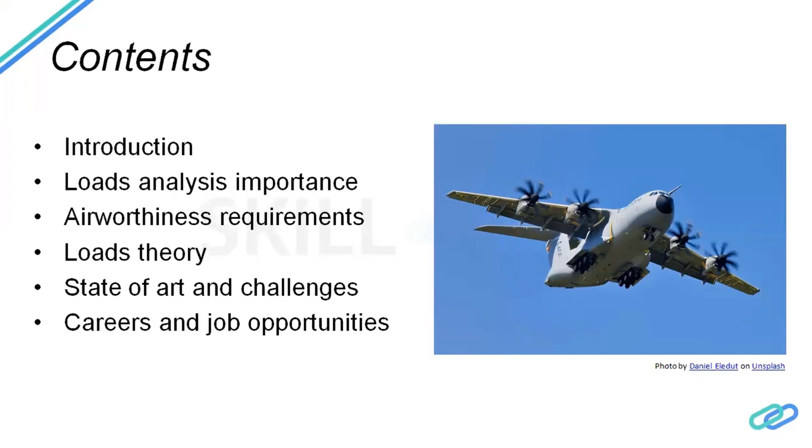I'm sure that everybody here knows that developing an aircraft is not a simple task. There are many areas that are involved. There are professionals dedicated for design, professionals that are dedicated for aerodynamic systems. There are a lot of systems in the aircraft, the operation of the aircraft, and areas that are related to the aircraft structure. Loads analysis is directly related to the aircraft structure. And it's one of the most important stages during an aircraft development.

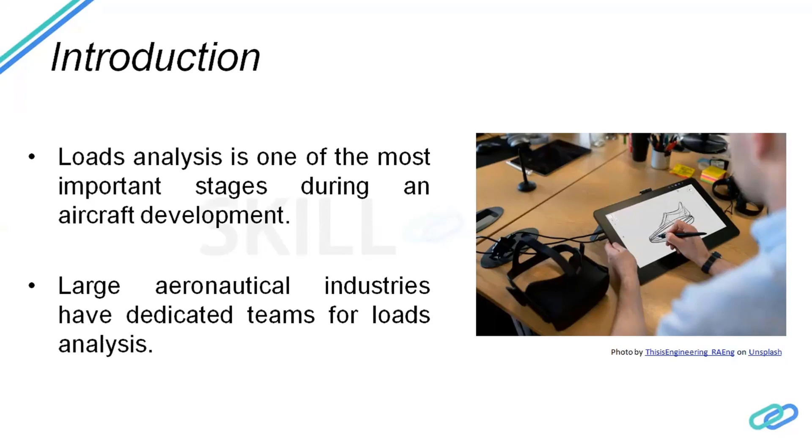Large aeronautical industries, for example, Boeing, Airbus, Embraer, and others, all of them, they have dedicated teams for loads analysis. There are many engineers working specifically in loads analysis. Now let's see the data exchange about these areas. Loads team will provide information for almost all areas in the industry, but the main areas are these three. You can see the stress team, the systems team, and operation.

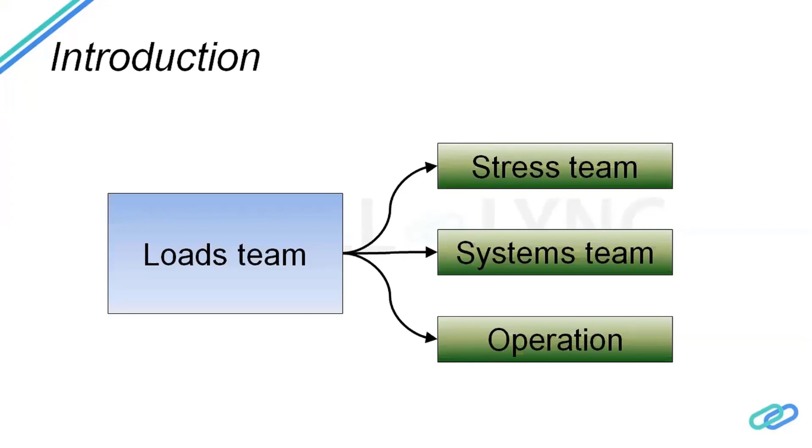The stress team is responsible for the structural project, and the systems team, it's a very big area because it's responsible for all systems in the aircraft, and it's divided into small sections. For example, electrical system, hydraulic systems, and many others. And the operation area that is responsible for making rules about how to fly the airplane, how to operate the airplane. So why loads analysis are so important?

I'm sure that everybody here knows that flying is safe and it must be safe. And everybody here knows that it must be feasible. I had a professor in the university. He used to say in a very fun way that to fly, we need only three things. We need angle of attack, relative wind, and money. So we should try to reduce money, but not reducing safety. Of course, aircraft must be light as possible. And as a consequence, it must be cheap.

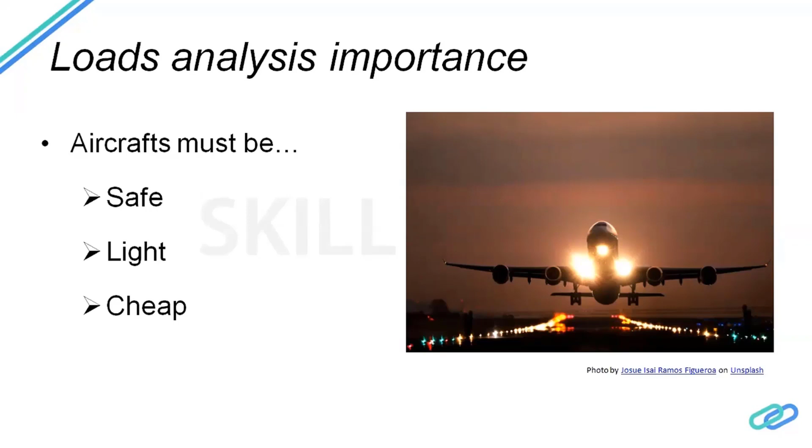I'm sure that none of you would pay $50,000 to fly from the United States to Europe. I would not. I would pay $1,000 or $2,000 because it must be feasible. People must fly. Okay. So let's go a little deeper in data exchange, the clients of the loads team.

As I've already mentioned, the stress team is responsible for the structural project of the aircraft. And to project, they must analyze the structure and size the structure. Okay. And they cannot do anything if they don't have loads that this structure must withstand. So I put there a very basic requirement that the aircraft structure must be able to support limit loads without any detrimental permanent deformation. It's one of the great amount of requirements that the structure must comply with.

For example, when I say limit loads, I'm talking about the highest loads that are expected in the aircraft service. And there are other types of loads. For example, ultimate loads, the structure cannot fail. And there are also fatigue loads. So, as I've already mentioned, the structure must be safe. And these two teams work together. Loads team provide information to the stress team, and the stress team will size the structure as light as possible, without forgetting safety.

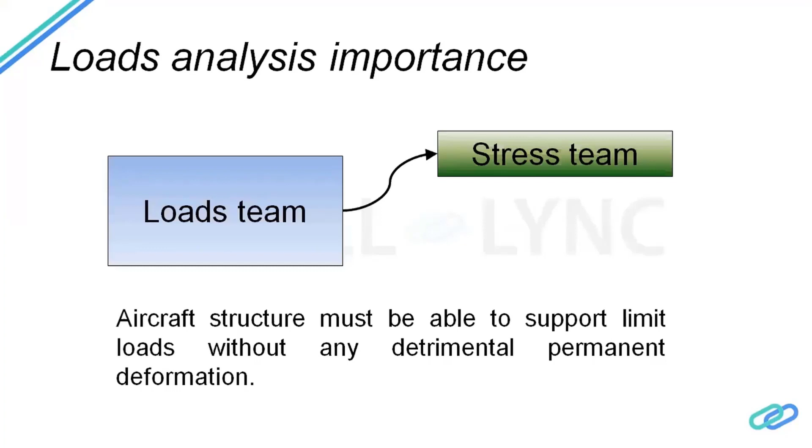The systems team, as already mentioned, comprises many other smaller areas, for example, hydraulic systems, electrical systems, environmental systems, and many others. I know that when airplane flies, when airplane goes through a taxi, it shakes. The airplane structure oscillates. And this oscillation, sometimes it's called vibration, sometimes it's severe, sometimes it's not comfortable. When we passengers feel these oscillations, sometimes it's not comfortable.

And the devices that are part of the systems must be safe. They must withstand this structural vibration without failures. For example, display monitors must stay safe. They must remain showing information for the crew. Hydraulic lines must stay safe, and also electrical components.

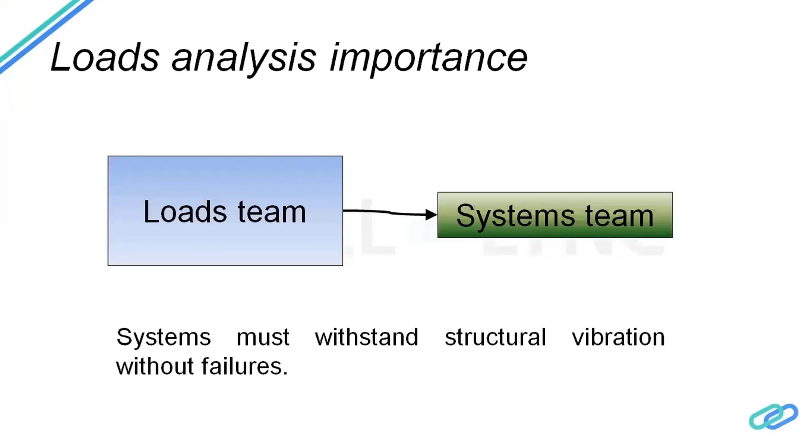So this structural vibration must be correctly determined by the loads team, and this data, this acceleration, must be provided to the systems team so they can guarantee systems will not fail. And the operational team is going to make rules about how the airplane must fly, especially concerning maneuvers.

For example, do you believe a commercial airplane is subjected to the same loads as an acrobatic airplane? Surely not. Because when we see an acrobatic airplane, the maneuvers are very severe, and as a consequence, loads are more severe. So the loads team must determine a flight maneuvering envelope, and this flight maneuvering envelope will be used in determining the airplane's structural operating limitations.

As an example, once I saw a video of a Hercules, a military aircraft. It was carrying water to extinguish fire, and I believe they put a lot of water inside it. And when the pilot pulled the command to a pull up, the wings broke, and it was tragic. I don't know if they did not respect the flight maneuver envelope, but it's very important because the aircraft must respect it.

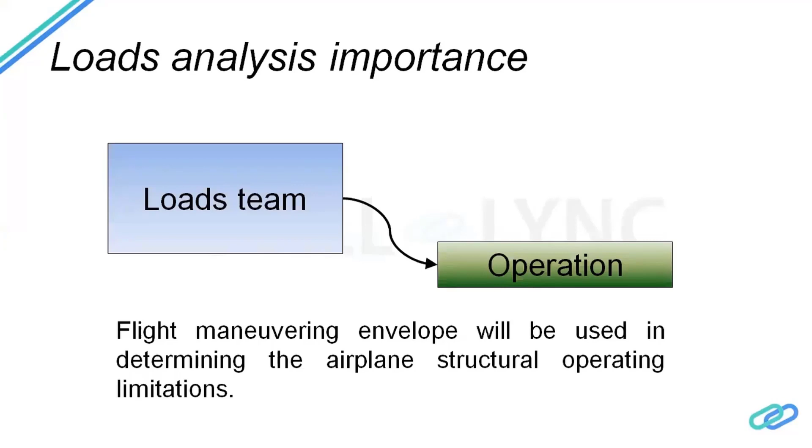One of the greatest efforts of the aeronautical industry is to comply with the airworthiness requirements. All technologies must comply with their specific requirements. And these requirements are made by agencies. The two most famous agencies are the Federal Aviation Administration in the USA and the European Union Aviation Safety Agency, and other countries have their agencies, and sometimes they have their specific requirements because of their particularities.

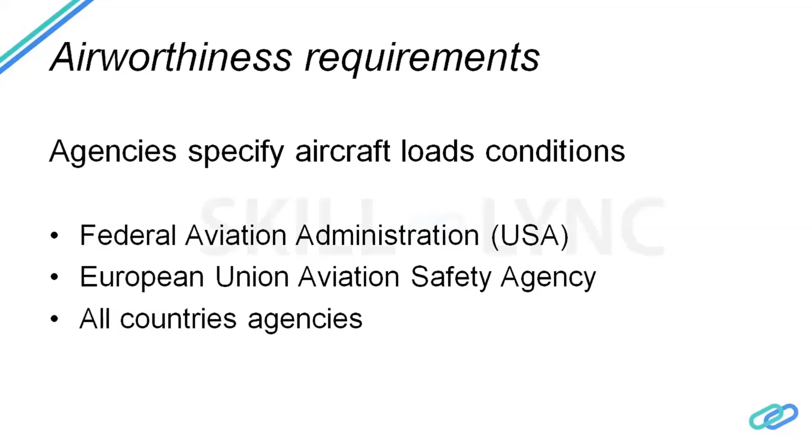And if I want to sell my aircraft, if I want to make money with my aircraft, I must comply with airworthiness requirements. I cannot design my aircraft the way I want to. I must respect these requirements. And now let's see how the loads team is guided by these requirements. But before that, we must define two types of loads. We have external loads and internal loads.

The external loads are loads that are applied in the aircraft by another body, something that is outside of the aircraft, for example, the air, gusts; when the aircraft touches down during landing, the runway applies loads in the aircraft. So these are external loads. And external loads will lead to internal loads throughout the airframe. Internal loads may be roughly defined as loads that a structural component applies in another component, or a component section applies in the adjacent section.

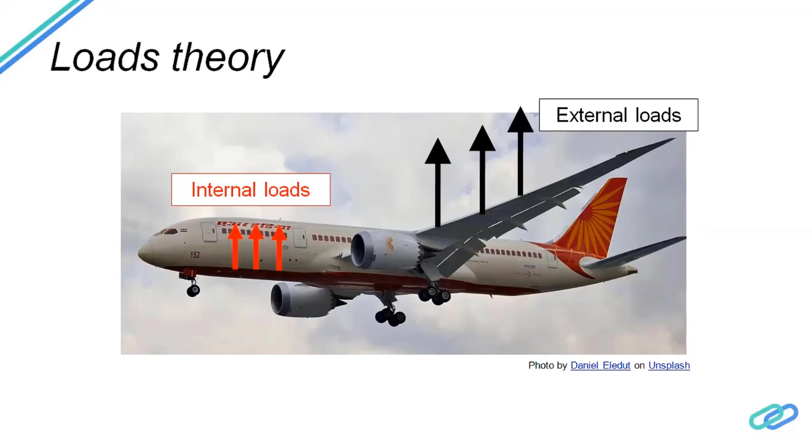When I say loads, I say forces and moments. Some components are more subjected to forces, others are more subjected to moments. And how are these loads determined? Which are the magnitudes of the external loads? They are specified by airworthiness regulations. Airworthiness regulations will state the conditions that engineers must consider to determine how high external loads must be.

For example, regulations state the speeds of the aircraft during landing, vertical and horizontal speeds. For example, gust intensities, gust shapes. Regulations say: design my aircraft to withstand gusts with certain severity. And internal loads are determined by loads theory, and this is all the engineering task.

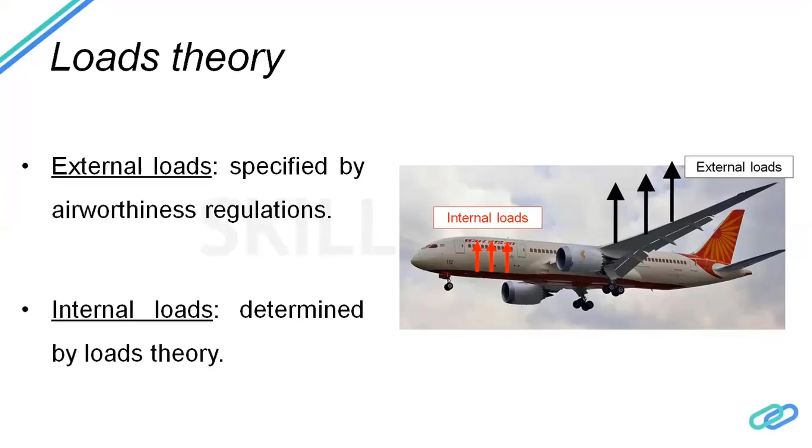The aerodynamic forces area is when a body is in a flow, and it's subjected to different pressures, for example, and these different pressures may lead to a resultant force.

This body may accelerate because of aerodynamic forces. And the elastic forces: the structure has a stiffness or flexibility, so the structure will deform. And this subject is commonly treated in strength of materials disciplines, mechanics of materials.

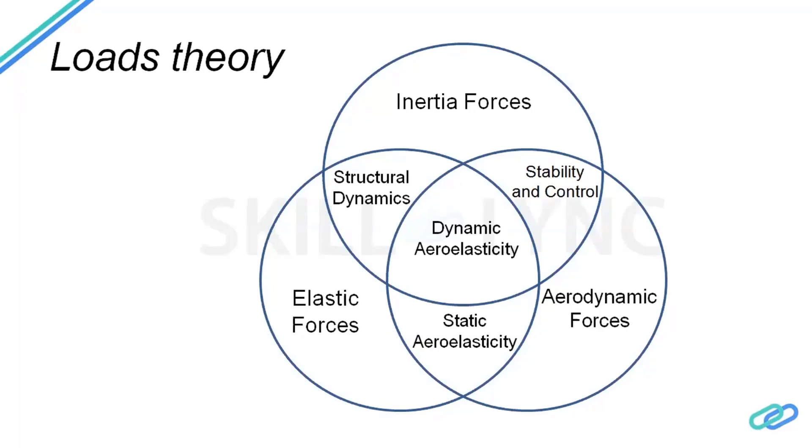The structure will oscillate, will vibrate due to aerodynamic forces. Maybe some instability may arise, and also controllability of the aircraft. So this all together is dynamic aeroelasticity. Let's see more details about loads, specifically about loads.

Loads may be considered static when they are not time dependent. In this case, the aircraft is considered as a rigid body, and we have the action of inertia and aerodynamic forces. However, stability and control is not included in static loads technology. It's another part, another team that is responsible for stability and control.

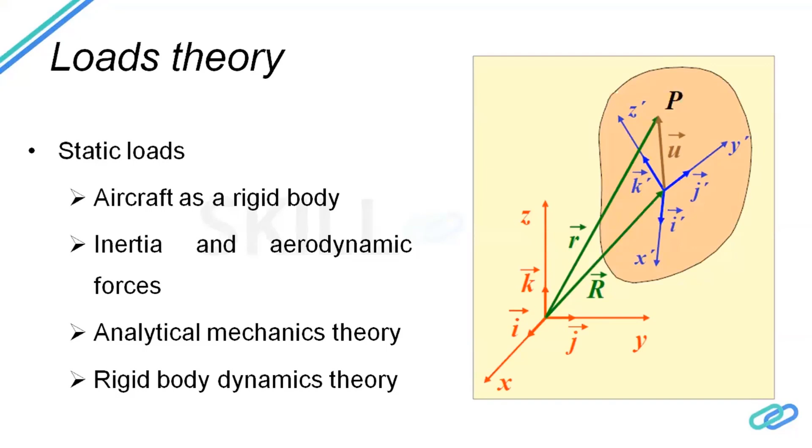When we are working with static loads, analytical mechanics theory is applied and rigid body dynamics is applied. Sometimes it's necessary to work with different coordinate systems. So we must know how to translate and to rotate coordinate systems. All this theory is involved.

Dynamic loads. When I say dynamic loads, I mean loads that are time dependent. And as I've already mentioned, the structure is flexible and it has some inertia. And of course, it has damping because all structures have damping. And this is the theory of structural dynamics, sometimes called vibration.

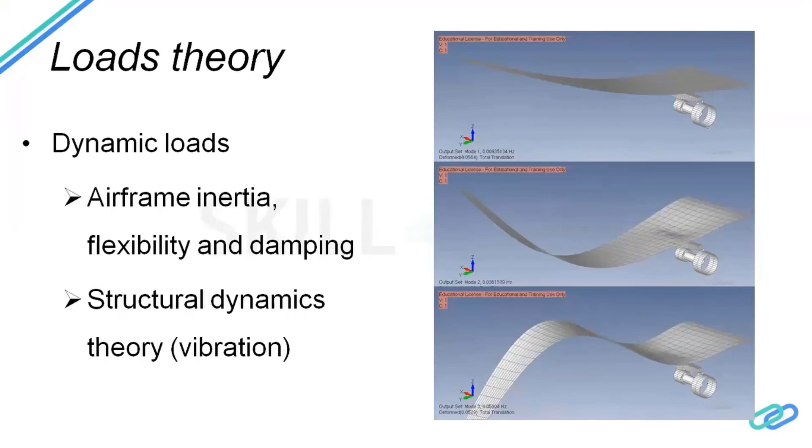We have mode shapes, as you can see on the picture. A wing is vibrating, and it vibrates in very different ways, different shapes. We call them mode shapes. Sometimes it's more convenient to work in the time domain because a dynamic load is a load that is time dependent.

And sometimes it's more convenient to work in the frequency domain, because when we have loads that are time dependent, sometimes the structure will respond more in certain frequencies. A very common situation is when the structure is in resonance. Resonance is when the structure has a peak of response at a certain frequency.